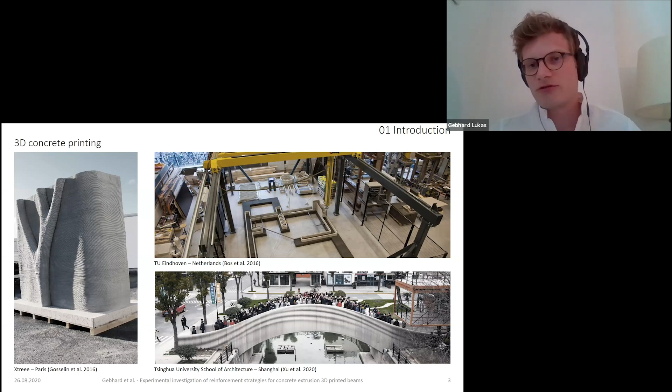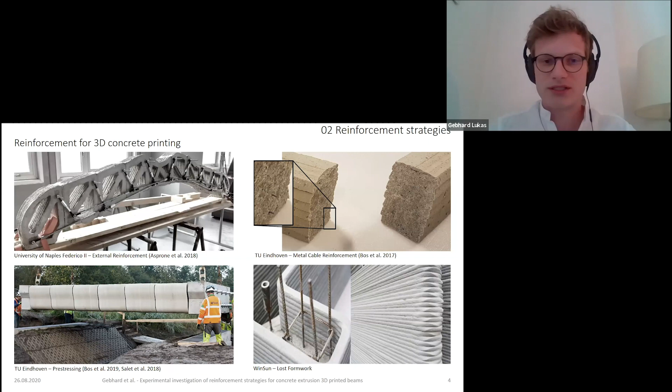Also at TU Eindhoven, the pre-stressing of a bicycle bridge to keep it in compression, and the use of the concrete only as lost formwork, which is already done in industry, where the reinforcement is placed afterwards and conventional concrete is cast around it. Also, there have been some developments in the field of fiber reinforced extrusion.

So, for example, on top you see a small sample extrusion for fiber reinforced concrete, and on the bottom, development of strain hardening cementitious composite with fiber reinforcement, also extruded. And on the right, a few more novel reinforcement approaches perpendicular to the layers, where reinforcement is introduced after the concrete printing and has these short reinforcement parts.

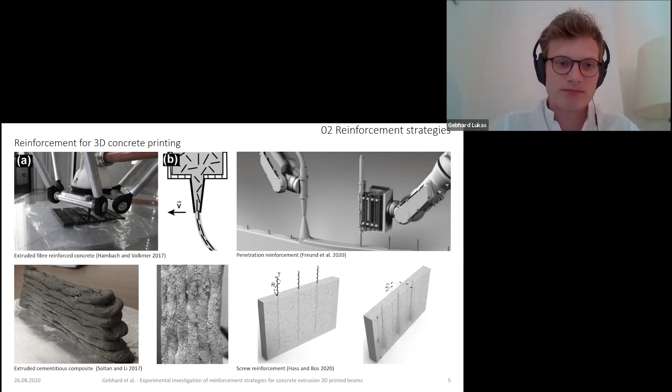So based on these, there is a lot of development and also some testing, but most of the tests are still on a laboratory scale. So only a few tests have been performed on a large scale, and I want to introduce some of the tests here. So also this bicycle bridge at TU Eindhoven was tested in 4-point bending as a scaled down version.

Also a pedestrian bridge by a company from Japan, Taisei Corporation, and a simplified version of the truss that we have already seen with external reinforcement was also tested in 3-point bending, and a topology optimized girder tested at Ghent University. And these tests have mainly been performed on really specific geometries for a specific use case. So it's hard to make general assessments from these tests.

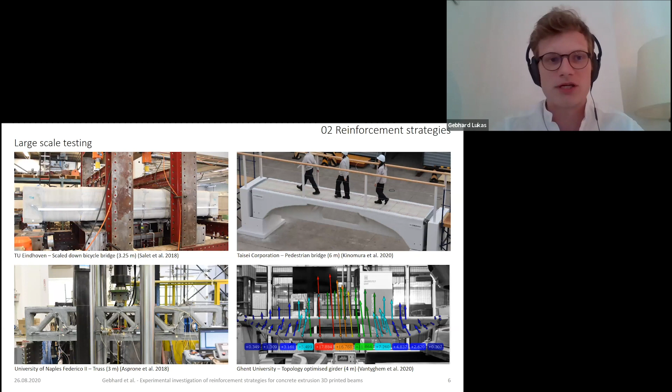And that's why in our experiment, we want to look at reinforcement strategies for beams, and we look at different longitudinal reinforcement and different transversal reinforcement, so shear reinforcement. And the general idea of the longitudinal reinforcement, since it will take the main loads in bending, is to have a system which has already proven itself in the industry, so conventional reinforcement or pre-stressing.

And for the transversal reinforcement, we wanted to look into more innovative solutions, which are particular to 3D printing, where we reinforce the 3D printing filament itself. And one approach was the cable reinforcement, which I already introduced.

And the other one is a reinforcement strategy, which we have recently been developing, so-called aligned interlayer fiber reinforcement, where compared to the other fiber reinforced extrusion, we aim to not extrude the fibers and the concrete simultaneously, but rather extrude the concrete and place the fibers in the second step in between the layers. This allows the use of larger and less expensive fibers, and gives also flexibility in the amount of fibers that can be placed. And these ideas were then translated to a set of beams, which we tested in 4-point bending.

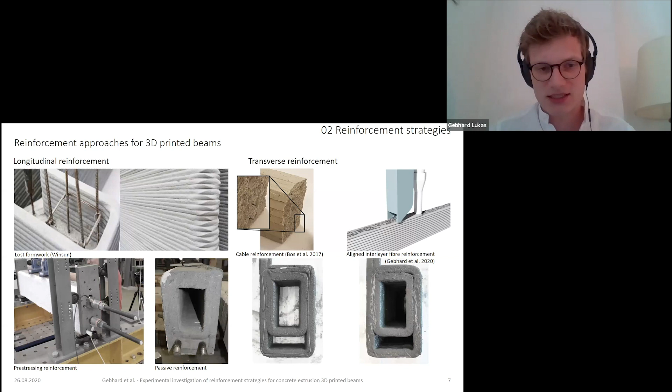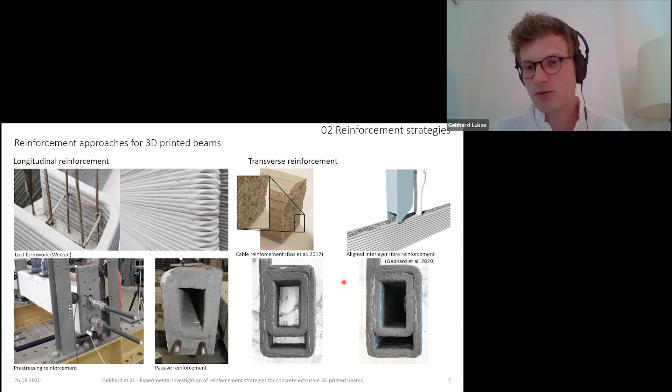Here, just a quick introduction of the reinforcement strategies, and afterwards I will introduce in more detail how we did these tests. So we did have one series where we used unbonded post-tensioning, which was achieved by these threaded rods that you can see here. And then we had conventional reinforcement, so conventional passive reinforcement, which was placed after printing in these voids down here and then grouted. And the two transversal reinforcement approaches, one was cable reinforcement and the other one the aligned interlayer fiber reinforcement.

Now, for the experimental campaign, we had two different series, as already mentioned. So the first series covers the post-tensioning with unbonded post-tensioning reinforcement. We produced 4 beams, always one set with transversal reinforcement. Here we used fibers at a concentration of 0.3%, placed only in the webs of the beams, and always an identical beam without this transversal reinforcement.

We also looked at 2 different post-tensioning configurations. One configuration was a continuous or a homogeneous post-tensioning with -9 megapascal over the entire cross-section. The other one had -9 megapascal at the bottom and -3 megapascal on top, resulting in -7.5 overall. And the final geometry can be seen on the left with a cross-section of 30 times 15 centimeters and a span of around 1.4 meters.

The second series used the conventional passive reinforcement with the grouting, so bonded passive reinforcement. We produced 5 beams. We produced 2 unreinforced beams, 1 beam reinforced with cable reinforcement as transverse reinforcement, and 2 fiber reinforced beams. And here the fiber reinforcement in one was 0.3% and in one 0.6%. And as you can see, the cross-section is slightly increased for these beams. So here we had 32 times 20 centimeters, and we printed 2 filaments, not just 1. And also the span was increased to 1.6 meters.

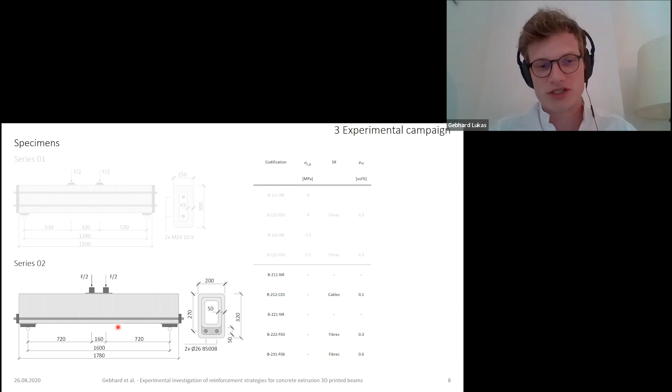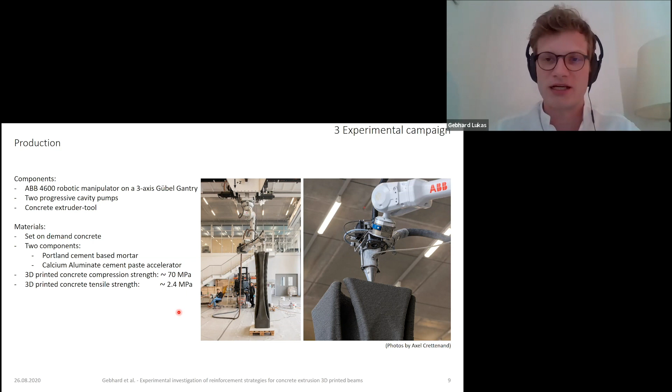And then we printed these beams. And just to say, this is just an exemplary column. These are not the beams that we tested. And we also tested the compressive and tensile strength of the concrete, which was around 70 and 2.4 megapascal respectively. And then we used this system to actually print our beams.

So on the left 2 pictures, you can see the print path and a print image from the beams of series 1. So you can see that we have the 1 void in the middle, and we only printed half beams for this session. So we always printed 2 half beams without transversal reinforcement and 2 half beams with transversal reinforcement. They had a layer height of 5 millimeters, and there was 1 filament with a width of 45 millimeters and a printing speed of 150 millimeters per second.

The series 2 was produced by 2 filaments, and we did avoid the printing of only half beams. So we printed the entire beam in one go. Again, a set of an unreinforced beam and a reinforced beam. The layer height was the same with 5 millimeters, but the filament was reduced to 25 millimeters, and the printing speed was 160 millimeters per second.

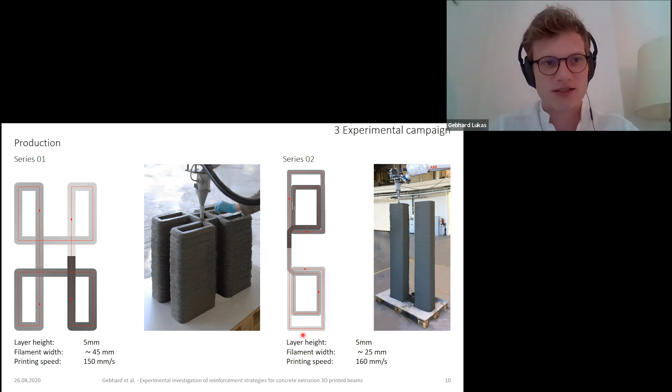Now, for the transversal reinforcement, here some impressions from the placement of the fibers. So all the reinforcement was placed manually to have a good control over the amount of fibers and cables placed. And the fibers were prepared before the printing on these magnetic strips with a plastic foil to have a faster placement of the fibers during printing.

The cable was pre-bent to fit the shape of the concrete cross-section, and the fibers were then placed. As a cable, we also used a high-strength cable with an ultimate tensile load of 1.3 kilonewtons, and as fibers, we used conventional hooked-end fibers type Dramix 3D 6535.

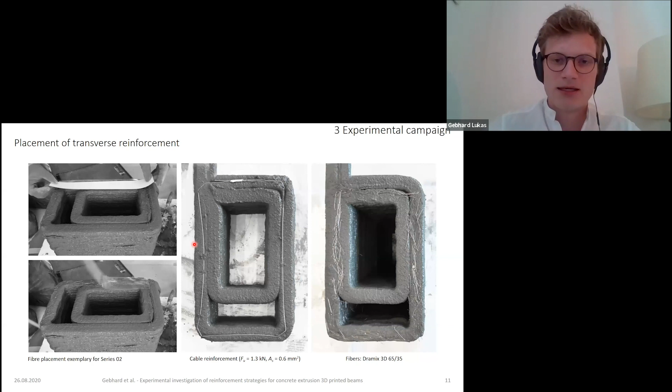Now, after printing, we had to do a few additional steps in order to be able to have good measurement. So one important part was the use of mortar beds, which you can see here, which had to be cast in all areas of load application due to the irregular surface of the 3D concrete printing. Additionally, we used digital image correlation to have a full field tracking of the displacements of the surface, where we applied a thin gypsum layer to have a smooth surface, then painted it white and put black speckles.

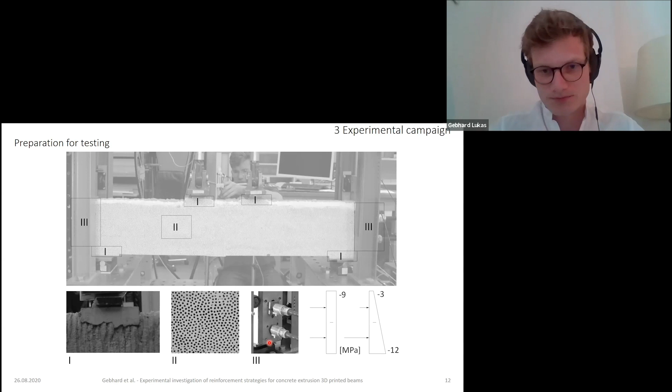And we also had to place the longitudinal reinforcement here, exemplary for series 1, where we have the 2 post-tensioning configurations. For series 2, we had the passive reinforcement, which we placed and then grouted. So this gave us this final testing setup, on the left series 1 and on the right series 2.

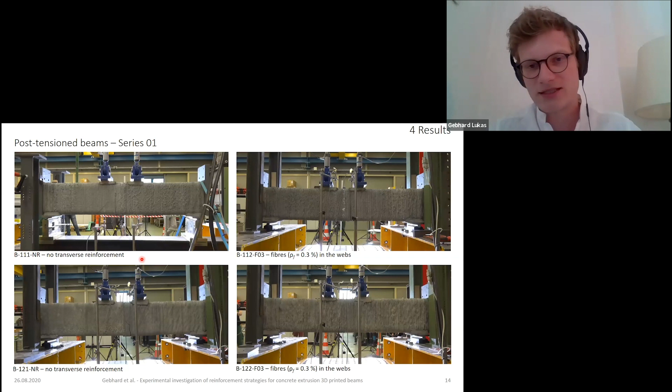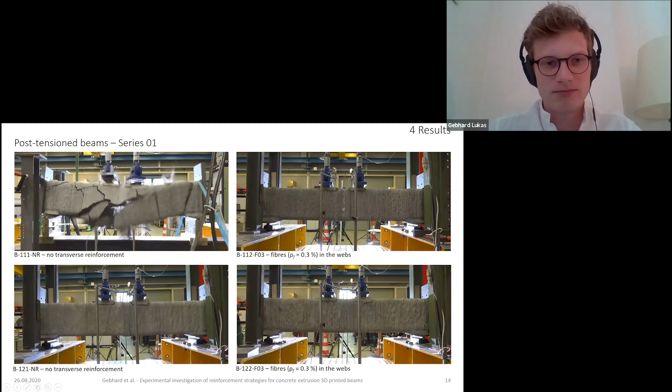Now I want to show you some impressions from the test. So this is series 1, so we have the unbonded post-tensioning reinforcement. Both videos on the left are without reinforcement and right is with fiber reinforcement in the web. So this video shows you the failure of the beam. So we see an explosive failure of the beam because we have no bond between the concrete and the reinforcement, and we also don't have any reinforcement in the concrete itself.

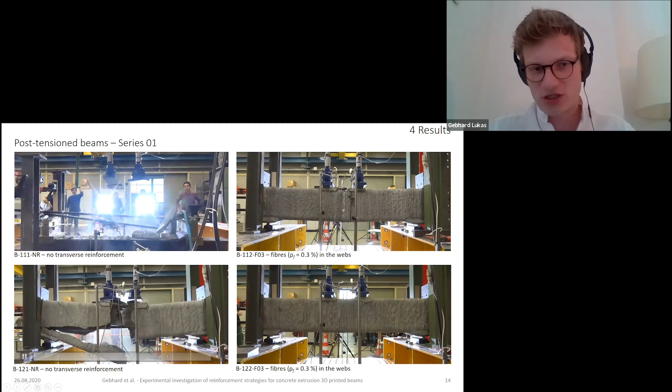Now, when we added the fibers, we achieved again a brittle failure of the concrete here in the compression zone, but the overall structure of the beam stayed intact, so no catastrophic failure. And the same could be seen for the series with the different post-tensioning, where we had a total collapse of the structure without reinforcement and bending failure for when fibers were present.

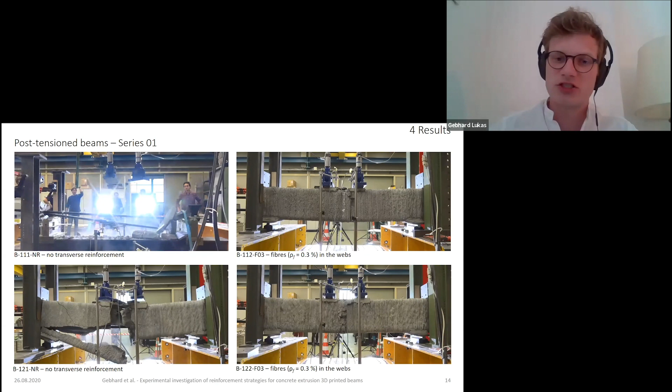Just to mention, this is the backside of the beam, so we do not see the digital image correlation surfaces here. But we use this digital image correlation surface to produce these crack patterns here on the right. And on the left, you see the load deformation curves.

So again, only series 1, where you can see the 4 beams. We have the unreinforced one here, fiber reinforced one, and then the different post-tensioning configuration on top. And what we can see is that they all behave quite similarly. And if you look at the crack pattern, we see that we mainly develop bending cracks. For beam 111, you can see that the cracks turn slightly to the right.

This was mainly caused by some torsion we had in the system, because for the first beam we did not have sufficient out-of-plane stabilization for the beams. What we could also see was that all the beams failed brittly at their ultimate load, and the ultimate load could be increased in both cases when fibers were present. However, since we only developed these bending cracks and no shear cracks, the fibers could not really be activated as shear reinforcement.

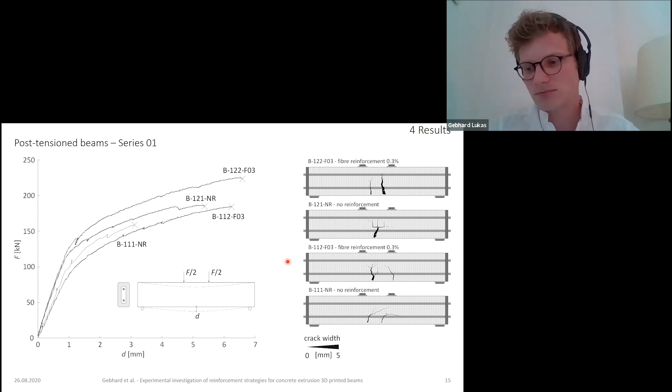On the other hand, for series 02, we can see again the load deformation curves on the left with the midspan deflection and the force applied, and on the right, the crack pattern where the line thickness indicates the crack width. If we go from bottom to top, we see the behavior of the two unreinforced beams down here, where at around 100 kilonewton they start to form diagonal shear cracks, and they only have these single shear cracks, which open quite largely, which you can see on the right for the two bottom figures.

All of these beams developed multiple bending cracks. However, since these cracks were significantly smaller than the shear cracks, they're a little bit hard to see in this display. For all beams where we had shear reinforcement, the load could be significantly increased. So the first increase you can see for the 0.3% of fibers with the formation of multiple diagonal shear cracks. So this time our shear reinforcement could be activated due to the bond between the conventional reinforcement and the concrete.

And then the cable reinforcement with only 0.1% was able to increase the force even more than the 0.3% of fibers. But there were less diagonal cracks and the cracks were slightly more open. And on top, we see the beam with the highest ultimate load, so with 0.6% of fibers. Here it needs to be mentioned that only the right side of the beam was fiber reinforced. That's why we had external shear reinforcement on the left side to provoke the failure on the right where we had the fibers. And also we could not double the ultimate load for double the fiber amount.

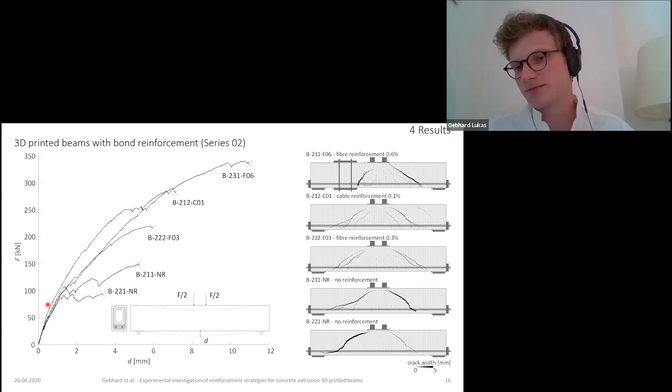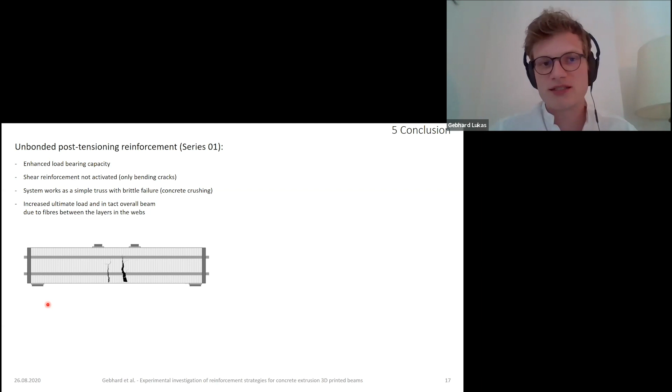So what we could learn from this experimental study. Here you see exemplary a beam of series 1, where we had, of course, an enhanced load bearing capacity due to the post-tensioning, as you would expect. However, we only developed bending cracks since the reinforcement was unbonded and the shear reinforcement was not activated. So we had a simple truss with a highly brittle failure. And when fibers were present, the ultimate load could be increased and the overall beam stayed intact.

For series 2, we could see that the behavior was quite what we would expect from monolithically produced beams, so the layering seemed to have really little influence on the overall structural behavior. We did develop multiple bending and shear cracks and could activate the shear reinforcement. All the beams failed again brittly in diagonal tension, which was, however, in this case intended since the bending reinforcement was quite over-dimensioned to provoke this shear failure. And both cable and fiber reinforcement enhanced the shear resistance significantly.

The cables had a higher efficiency, so for cases where the ULS is decisive, this could be a good approach. However, for the cable, we still need to look closer at the bond between the cable and the concrete. And the fiber reinforcement was less effective than the cables. However, we had thinner and closer spaced cracks, which could be beneficial for some serviceability applications.

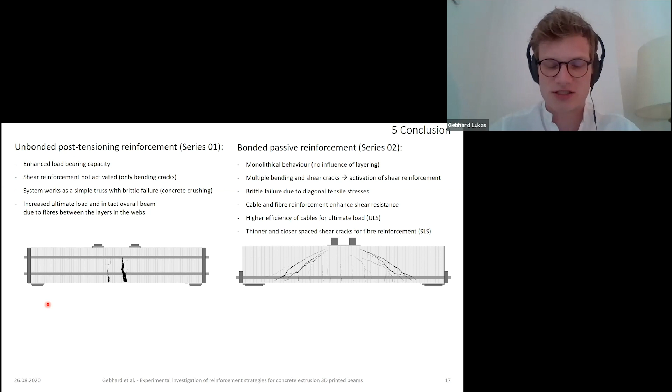Now, an outlook on what we're looking at next. So one problem, of course, with this reinforcement approach is the straight rebars, which limit the geometry. And here we want to look into more curved applications, such as curved post-tensioning cables. Also, all the reinforcement was placed manually, so we want to look into automation of the reinforcement placement.

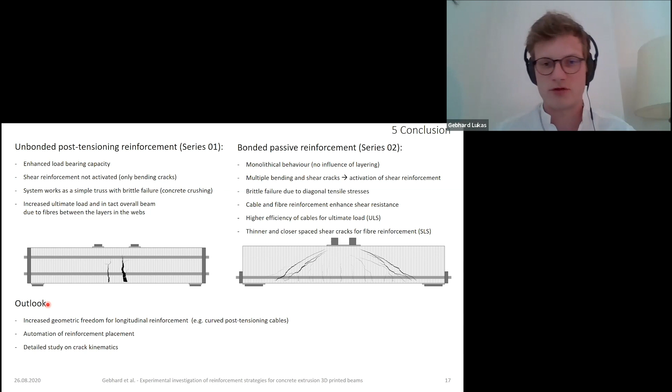And currently, we have an ongoing detailed study on the crack kinematics to assess the performance of the shear reinforcement.